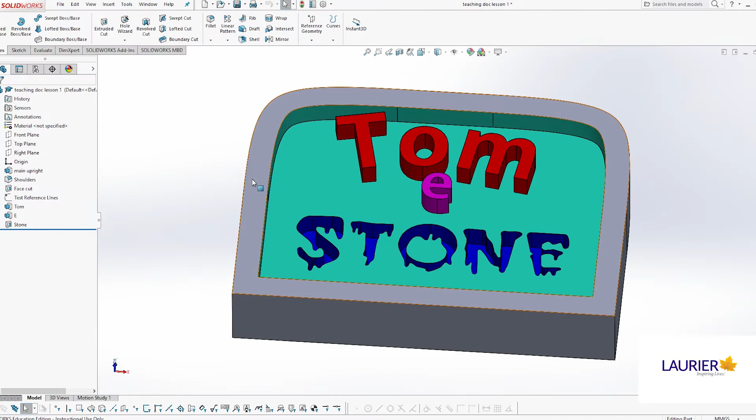But before we get started, you can see that the shape looks like it's kind of flaring out visually. It's not actually flaring out. The back edge is actually the same length as the front edge. It just visually appears to be flaring out because we expect it to be a bit cone-shaped due to the perspective effect.

If we want it to look a little more natural while we're working on it, we can select Perspective from our View Settings menu and we'll get that coned-in shape we'd see in real life. If we want it even more realistic, we can add Shadows in Shaded mode from this same drop-down. We usually run without perspective, but this isn't bad looking, so we'll leave perspective switched on.

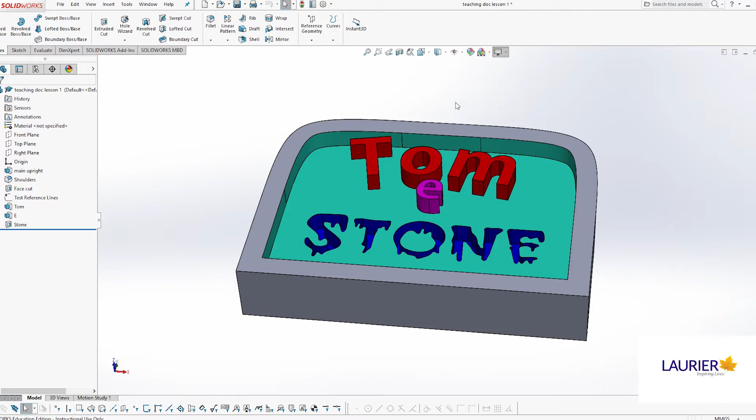To add the tongue, what surface are we going to draw on? By now, you should all correctly tell me that we're going to draw on the bottom of the upright. So select this surface, and then we'll turn it so that surface is normal to our line of view.

The tongue is going to stick out, so what type of 3D object is that? Yes, it's an extruded boss base.

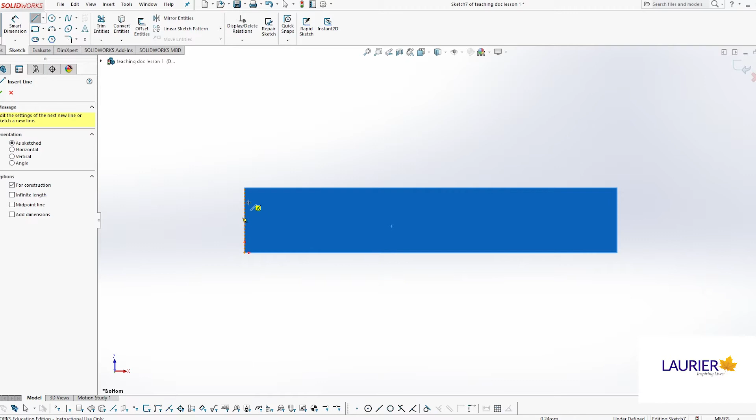Because lazy is good, we're going to try to position this thing and set it to size with a minimum number of dimensions. We'll reach up and get a center line, and we'll set one end of that center line to the midpoint of one side of the upright, then go across horizontally and set the other end of the center line to the midpoint of the other vertical.

We'll press Escape to finish drawing that line. Is the line centered top to bottom? Well, yes, because we started on the midpoints of the end lines. So obviously it's centered along the lines that we'd set it to the midpoint of.

Now remember when we talked about our entities and how they can be used to locate things or to grab something? One of the entities that we get on any straight line is a midpoint. So if we select the midpoint of our line, it's going to be centered side to side. We already know that the line is centered top to bottom, so the midpoint of that line is going to be the geometric center of this entire rectangle.

That's good. Why is it good? Because it saves us work. Instead of using our usual corner rectangle, we can get a center rectangle from our rectangle drop-down this time.

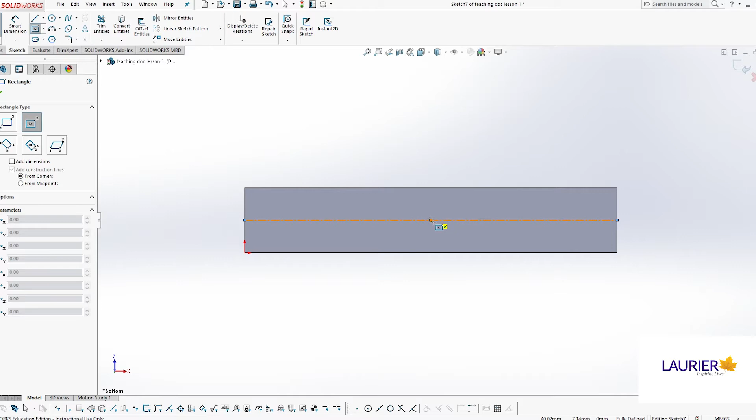We can set the center of the rectangle right at the center of that surface and just drag it out. It's centered, and no matter what we do with the size of that surface, it's going to remain centered. If we used dimensions to position it, then when we change the size of the surface, we would also have to change those dimensions. This way we don't.

Notice that I drew the rectangle much bigger and thicker than it needs to be. That's to make it easier to select the lines when I want to put dimensions on them.

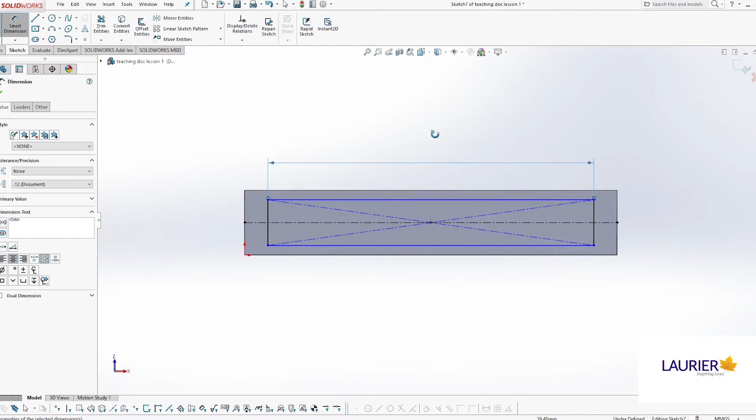We're going to put dimensions on them to force it to size, and we're going to go with a horizontal dimension of 70, and we'll say yes to that.

And we'll go to the vertical dimension. It's currently 9.94. We don't want that. We want 4.7, right? We don't need to design in any clearance here because the kerf of the laser will set an appropriate clearance for assembly.

But if we were working on a 3D printer or a metal cutting machine, we would have to make the size of the hole larger than the size of the object that needs to fit into it, or we'd run into problems during assembly.

So we've got an enclosed shape, and since all those other lines are construction type lines, they'll be ignored, and we don't have to worry about them when we extrude. The solid lines make a nice closed contour. So we're going to say yes, and we're going to exit sketch.

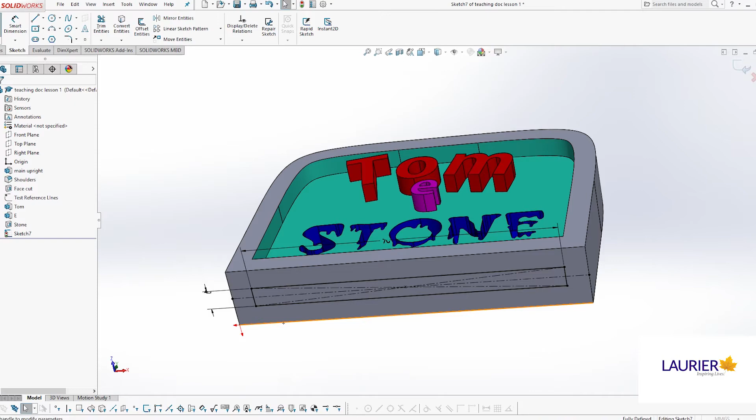Now this shape is sticking out 10 millimeters, which is not actually that bad in terms of design, but we are kind of stuck because we're laser cutting, and this tongue is going to intersect with a base that's 2 layers of 4.7 millimeter plywood thick.

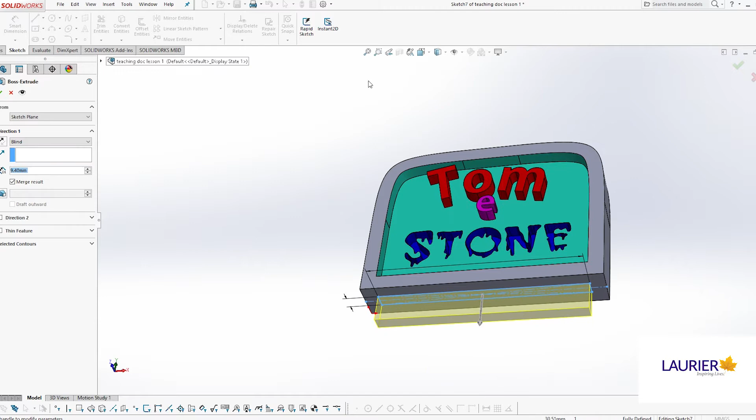Because I'm lazy and I don't trust my own math, I'm going to type in 4.7 times 2. Boom! That's a 9.4 millimeter tongue, which is exactly what we wanted. We'll say yes to accept our changes. So now we've got our tongue, but if you look in this corner, there's a potential problem.

If we try to plug it into a groove the exact same size, because this is a sharp corner, we're going to have to get it lined up absolutely perfectly to put it into the groove. But if we have a little bit of a slope on there, that slope will allow us to be a little bit misaligned and yet still help that part slide right in.

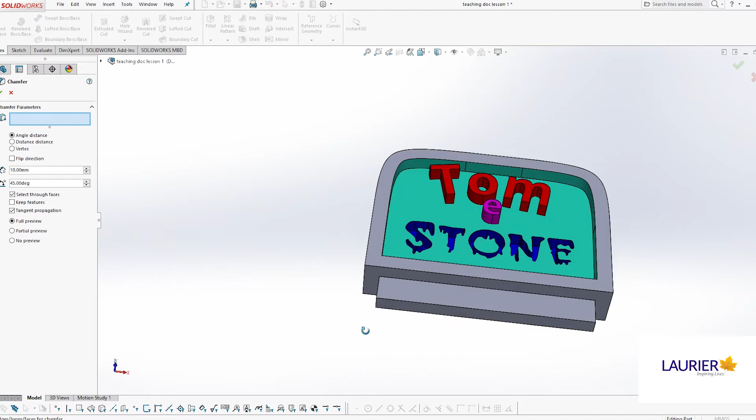Now the angle of the slope, we're going to talk about that in a minute. The first thing we need to do is say OK to the chamfer tool and select the edges we want to chamfer. Then we select this edge. Oops, I got a face there instead of an edge. So I'll just go up to the box, right-click on the face, and press Delete. Try again, and there we go.

It defaulted to a 10 millimeter 45 degree chamfer. You can see that's not going to really do us much good because the chamfer is so big that it would allow the top part to move side to side pretty good, since there are no adjacent walls normal to that vector to hold it into place. So obviously that's way too big. I think 2 millimeters is more reasonable, and that's pretty good. It's still at 45 degrees though.

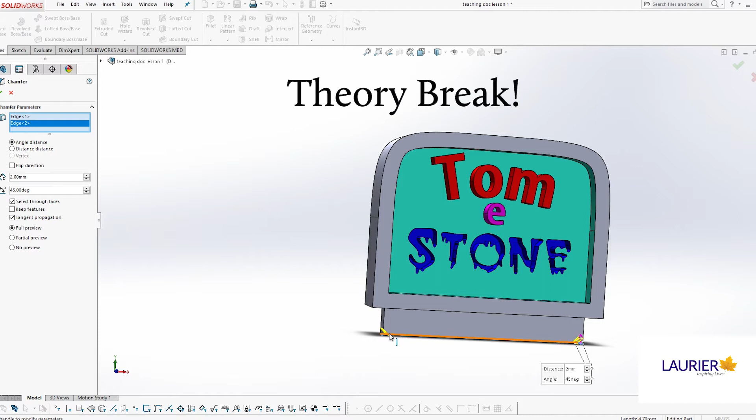So we'll take a little theory break here and talk about how these angles work. Think of this a bit like a doorstop, a wedge shape with a rise over a run. But right now it's at 45 degrees, so the rise and run are identical. If we come in misaligned and the slope hits this corner, it's going to create a force back upwards equal to the side-to-side force being generated. So this impact is just as likely to bounce the part back out of the slot as it is to redirect the force to move it side to side so it can fall in properly.

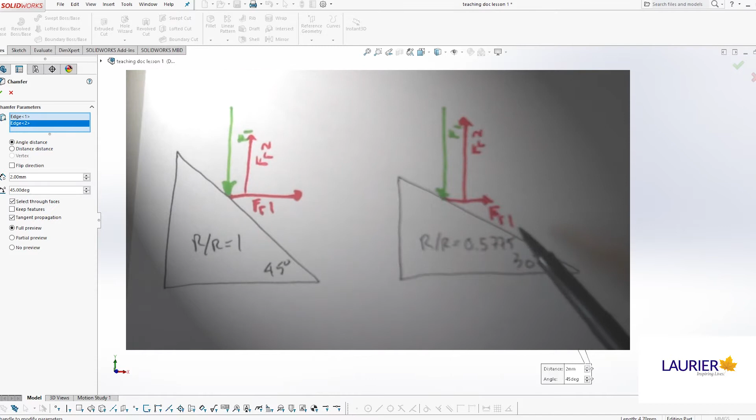If we go flatter than 45 degrees, say 30 degrees, we're actually going to get more force back upwards than side to side, because the amount of force generated is inversely proportional to the angle between the force vector and the slope. But if we go to, say, a 60-degree angle, it'll give us around 2 units of vertical chamfer for every 1 unit of horizontal chamfer. This puts the mechanical advantage in the right direction.

We'll try this on our part. So now we've got an alignment allowance of plus or minus 1 millimeter, which gives us a bit of room to play with. But now the side-to-side force that the slope will create is much greater than the force back upwards, so it will easily move the upright side to side so it lines itself up and drops in. Plus, unlike the 10 millimeter chamfer we started with, it still has 7.4 millimeters of vertical wall contacting the inner wall of the slot in the base.

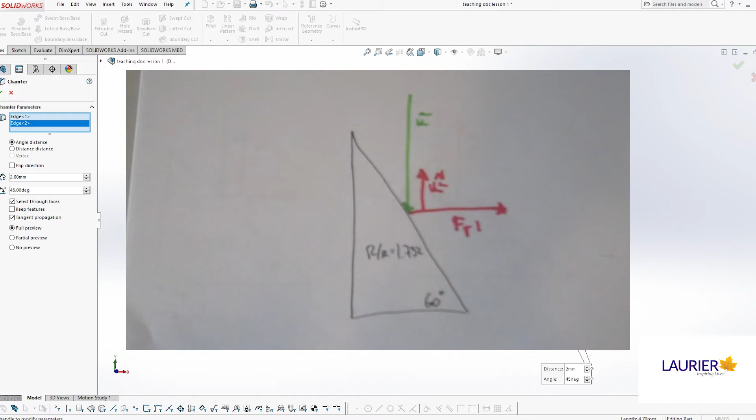So you can see that we can change the angle. We can even go by distance as well as by angle. We're going to try 2 and 10. Let's have a look and see what that looks like. Yeah, that looks kind of silly. So let's try 2 vertical, 1 horizontal. That's pretty good, pretty close to the 30-60 that we like.

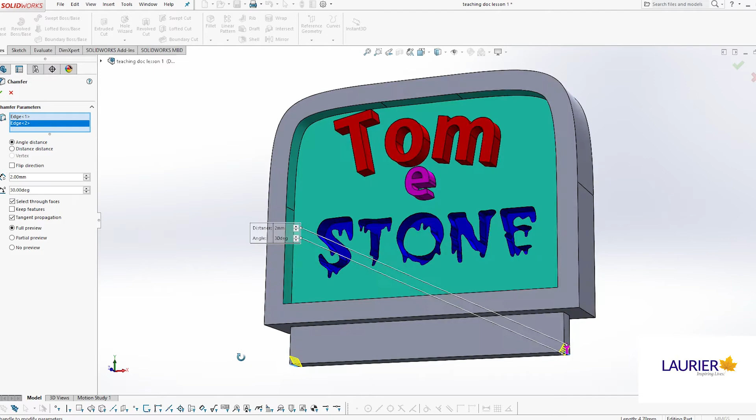Or if we wanted to, we could use angle distance to set a similar result. So that's a pretty good chamfer. We'll say yes, and we'll click. That's almost the entire part. We've drawn everything, but now it's time to learn a little bit about how the CAD operates and how it draws. Let's get started on that.

I'd like you to take your zoom window, zoom in on one of the filleted corners and zoom in pretty close. You can see that your lines here aren't exactly smooth. They're kind of herky-jerky, aren't they? So what's that all about? Well, we're going to take a bit of a theory break and talk about it.

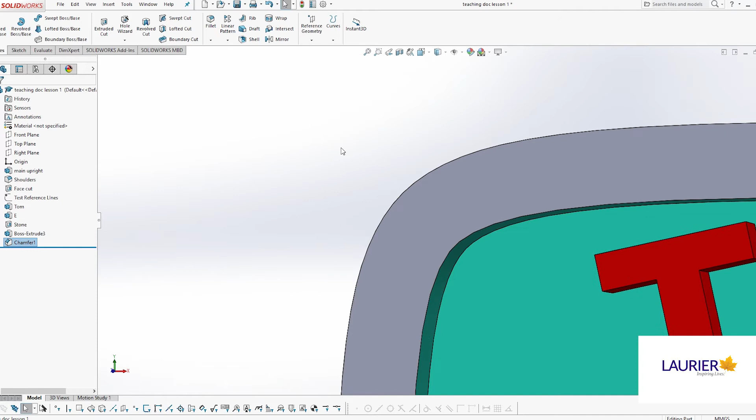If I draw a circle and I want to know the area of that circle, and all I've got with me is a ruler that can measure straight lines, can I make a pretty good estimate of the area of that circle? Well, the answer is yes, I can. I can measure it in a few different directions and find the midpoint pretty accurately.

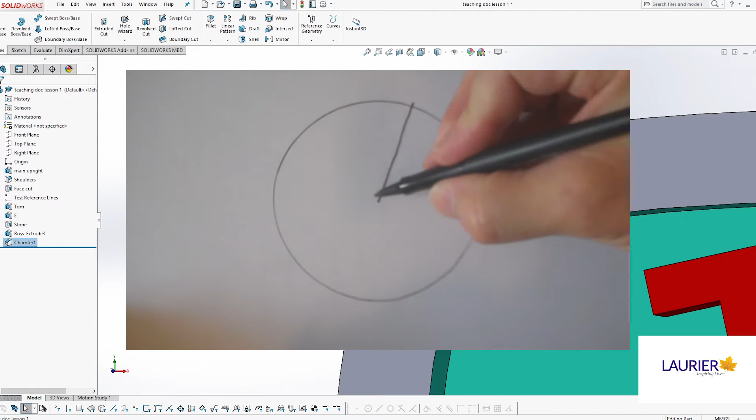If I then take an isosceles triangle where the base of the triangle is a line of best fit with the outside diameter of that circle, and the tip of the triangle is on the midpoint of the circle, what's the area of that triangle? And of course, the answer is the area of a triangle is always 1/2 base times height. If I then draw a bunch of identical triangles and completely fill the circle with these identical triangles, what is an estimate of the area of that circle? Well, of course, the estimate is the sum of the areas of those triangles.

N times base times height, all divided by 2. So let's have a look at this. Where is our error of estimate coming from?

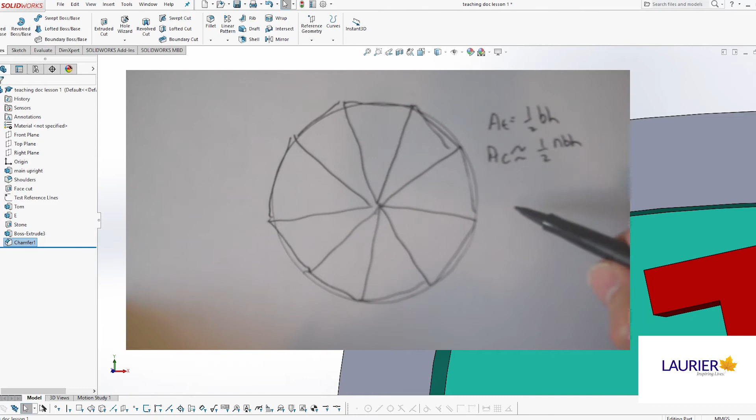The vertex of every triangle is in the exact same spot in the center of that circle, so there's no error there. The side of each triangle mates up perfectly with the side of the next triangle, so there's no error there. So the error is between the line of best fit of the base of the triangle and the curve of the circle.

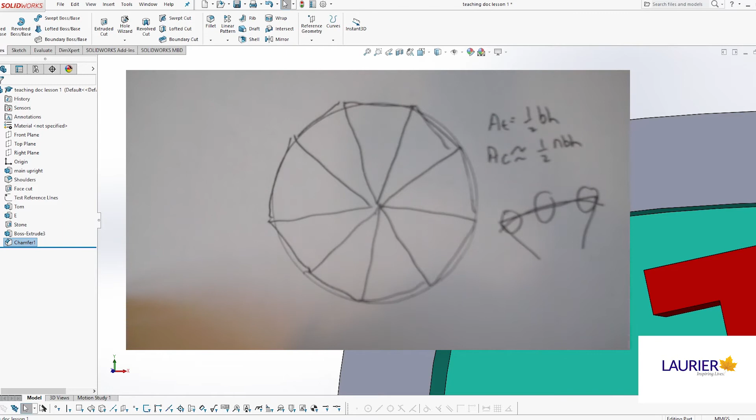Why is this? If we want to do an analogy here, we can say let's take a 1-foot ruler and we'll put it on a basketball. So we've got this 1 foot of straight line and it covers the arc of a basketball for 1 linear foot. If you were to put a 1-foot ruler right up against a basketball, would there be air gaps between the end of the ruler and the basketball?

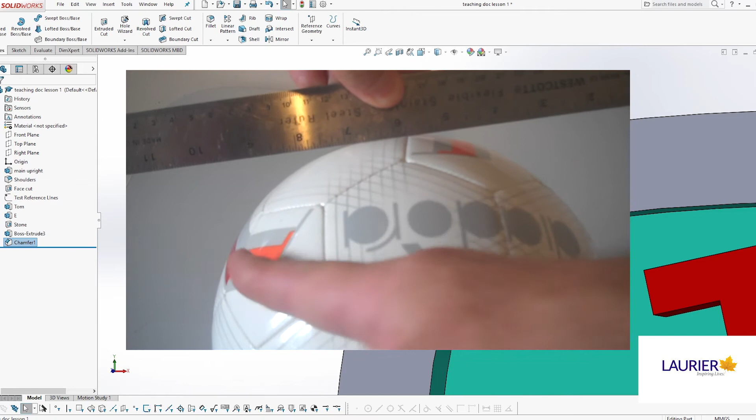The answer is, of course, there's going to be a big air gap between the ends of the ruler and the basketball. If we then take the same ruler on the surface of our perfectly spherical Earth, and we put the ruler up against the surface of the Earth, we would be hard-pressed to see any light under the edges of the ruler at all, wouldn't we? That's because the curvature of the Earth over 1 foot is so little that it's almost straight across that line.

1 linear foot on a circumference that big covers very, very few radians of the arc. But when you put the same length of straight edge up against a much smaller diameter arc, then you're going to cover a lot more radians in that linear distance, and the divergence between a straight line and an equal length of arc is going to be much greater.

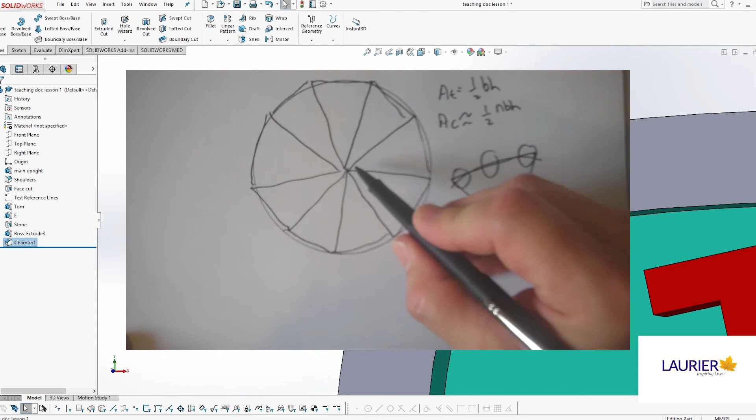So how can we use this principle to make our estimate of the area of this fixed size circle much more accurate? Well, if we take the number of triangles and we double it, then each of those straight lines covers half as many radians of the arc, doesn't it? Therefore, our error of estimate drops to half. If we double the number again, we halve the error yet again, and so on and so forth.

If we took an infinite number of triangles and we filled the circle with this infinite number of triangles, what would our error be? Well, of course, we can't actually do an infinite number of triangles, but the error at infinity would be 0 if we could. When we ran into this infinity problem back in high school, we'd use limits to get around it.

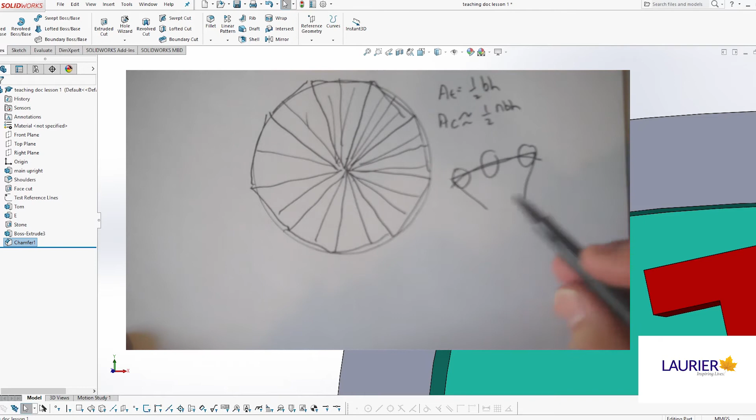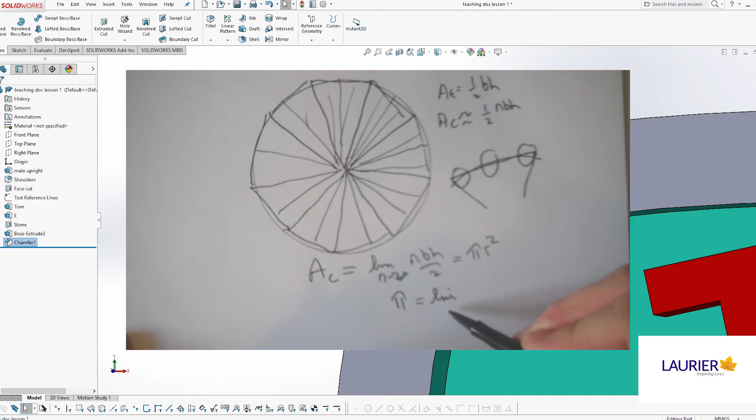So, the area of this circle is the limit as n approaches infinity of n b h over 2. Now suddenly we remember that the area of a circle is pi r squared. Doing some substitutions, that means that the limit as n approaches infinity of n b h over 2 is also equal to pi r squared. This means that pi is equal to the limit as n approaches infinity of n b h over 2 r squared. We've just done a mathematical proof of pi, and we could actually do a really accurate estimate of pi by using this equation and physically measuring these things out.

So here ends our little side trip into theory land. Why did we talk about this? Because SolidWorks does not actually use curves, ever. Curved lines are always a series of straight lines that estimate the curve.

When these polygons get changed into 3D features, this means that the entire feature is made up of a series of 3D polygons with straight line edges. If you remember that rectangle sketch back in lesson 1, we made it into a polygon by changing the opposite sides so that they were no longer the same length.

Then we calculated the length of the base using trigonometry. With the top line held to a fixed length by its dimension, the length of the base would vary depending on the angle of that top line, the hypotenuse.

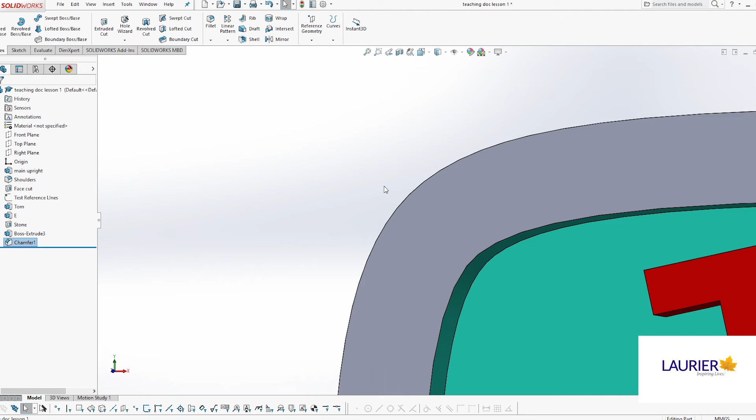Similarly, if I hold up a piece of paper with a 10 centimeter square drawn on it so that you're looking normal to the face of the paper, the square will look like a square. But if I tilt the paper back on the horizontal axis, that square is going to start to appear shorter and shorter in height while remaining the same width.

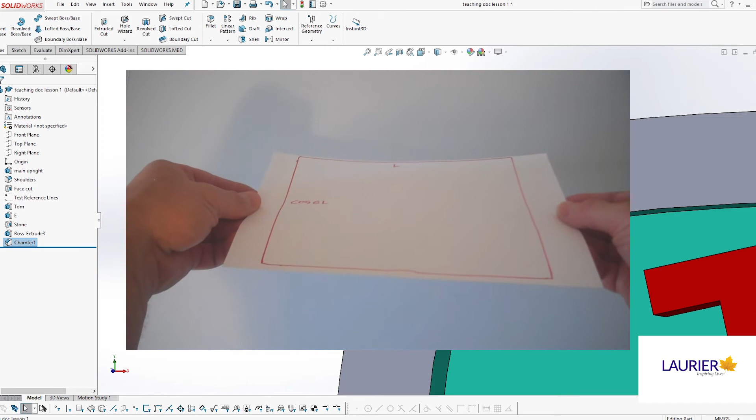Just like happened in lesson 1, the apparent length of that line that's tilted back, when displayed on the screen that's normal to our line of vision, will be cos theta times h, where h was the original height of the line, and theta is the angle it's tilted back on relative to the display screen.

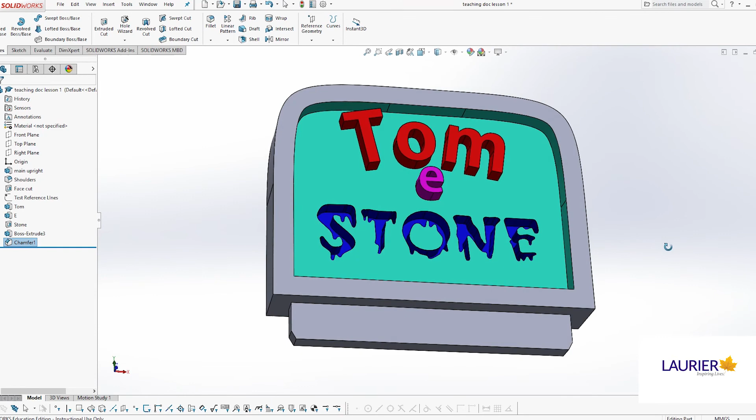Now that math is a pain in the backside, but the reason we talk about it is that every single time you take your mouse or the cube and you reorient this part, for each and every one of the thousands of polygons in the part, this math needs to be done by the CPU and the GPU.

The apparent smoothness of those arcs is based on the number of parts it's broken up into, the number of little line segments. Even in standard resolution, you can see there would be an awful lot of triangles and rectangles to do these calculations for. That means CAD uses a lot of processor time and video processor time, which is why any powerful CAD always requires a very powerful computer.

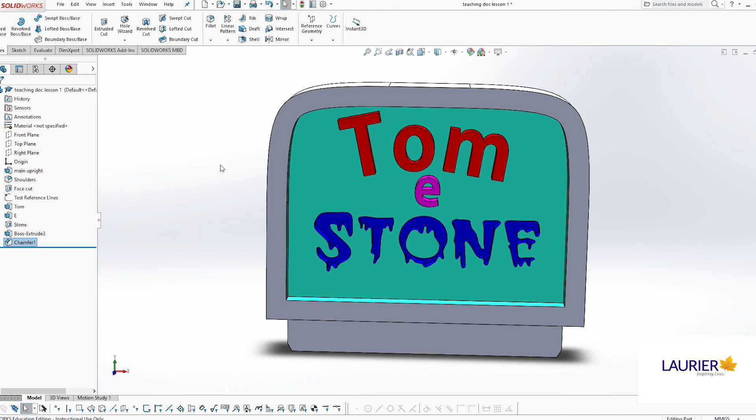If you've got a really complex shape with a lot of geometry, it's going to really load down your system and may cause delays while it does these calculations. So to speed up the CAD defaults to a fairly low resolution. Like most things in making, this solves one problem but then causes another.

If we leave things in low resolution, that lower resolution carries over into the actual part when we export it for 3D printing or laser cutting. We can turn up the resolution on the export engine, but that just means we get a crisper, cleaner, herky-jerky curve. So how do we fix this?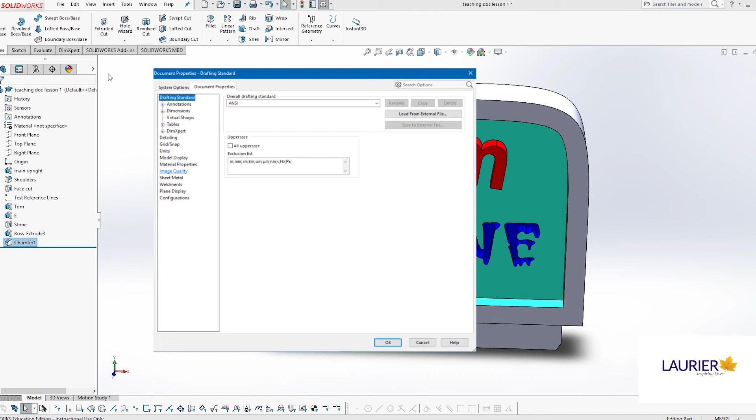Well, we can go up here and select this sprocket-looking thing, System Options. We go to General System Options, then open the Document Properties tab, and go down to Image Quality. We can see the slider for image quality.

If we slide it all the way to the left and look at the circle in the preview, we can see the circle is estimated by 6 triangles. As we go the other way, it gets smoother and smoother. So we'll put the slider right up into the red.

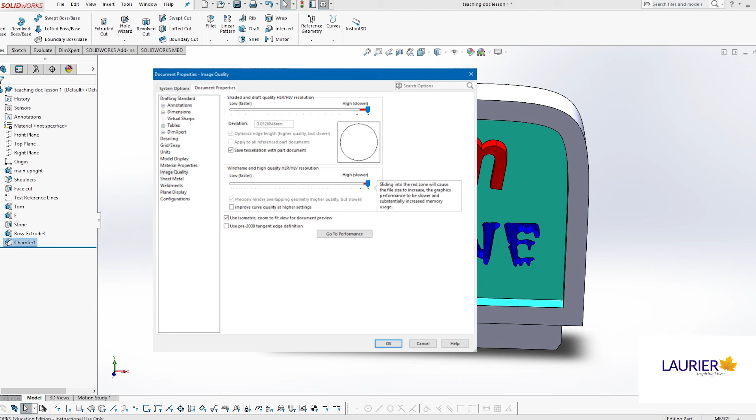For something this simple, because we have a pretty powerful computer, this won't slow it down one bit. The wireframe resolution doesn't preview, but we'll slide into the red as well so that no matter what we're doing with this shape, it will be rendered in high resolution. We'll exit that menu, zoom in on the corner again, and now we've got a super smooth curve.

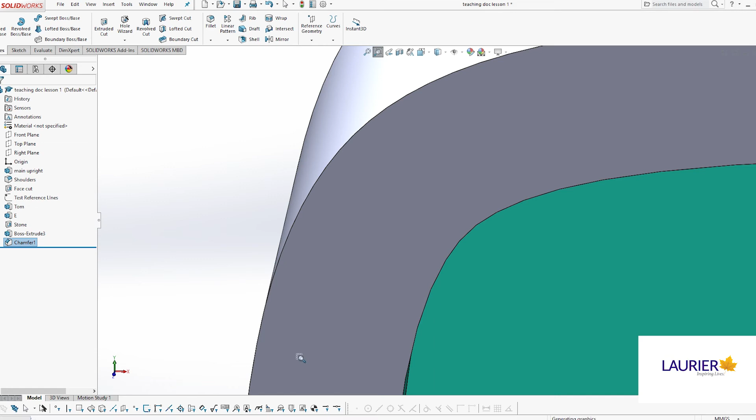Now the question is, how much more math do the processors have to do at a higher resolution? We're working in 3 dimensions, so let's figure out how much more math will be needed if we double the resolution. When we double the resolution, we double the amount of information we know about each direction, correct? So we've got twice as much information about x, twice as much about y, and twice as much about z. So the answer is 2 times 2 times 2.

The amount of math varies with the cube of the ratio of the change in resolution. So if we double the resolution, it has to do 8 times the math. If we quadruple it, 64 times the number of calculations will be needed. So typical to any kind of engineering, there's a trade-off to be made.

What we do to get the best performance in both the drawing mode and the export mode is leave the drawing in the lower default resolution while we're drawing it, and then just prior to export, once we're done all the drawing operations, that's when we put the resolution up. We don't have very many more drawing operations to do on our parts, so we'll just leave the resolution up because it looks really nice this way.

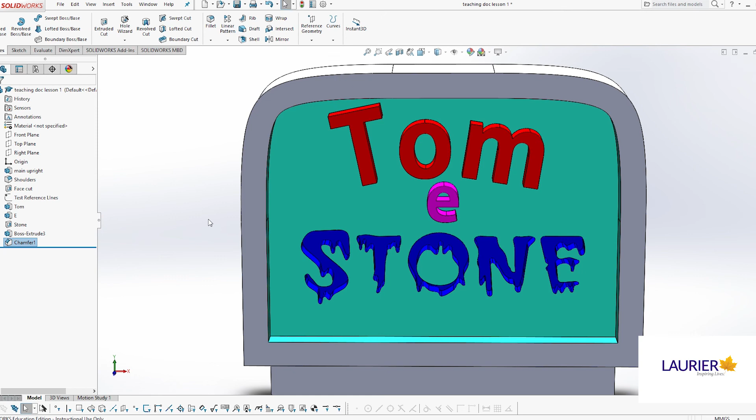So that's all we need to do on the tombstone upright, but we can do a little bit of fine tuning on the color because I'm sick of looking at gray. Let's go up here to the top of our directory tree and select Teaching Document Lesson 1.

This is the master control for this part. Everything below it in the directory tree is part of Teaching Document Lesson 1. Every command we apply at this level is going to be a global command and will be painted onto everything else below it. But it will be a global command with a caveat.

If we input a global command for a new color, for example, it's going to paint everything that isn't already some other color into the color we've selected. But a color instruction on one of those specific features down below will override the global command and keep the old color if it pre-existed the global command. And it will overwrite the global command if the global color was selected first.

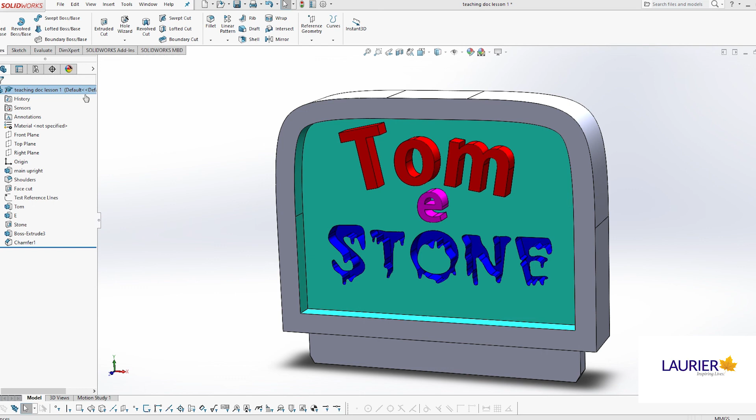But the global command will paint everything else, so we're going to go up here, right-click, get our beach ball, select Teaching Document 1 because that's what we want to apply to, and we're going to paint this part a lovely lime green.

So we're done the upright, and we'll say Save. Well, that's it for now. We'll design our base and we'll assemble the upright and the base in Lesson 2. See you soon!